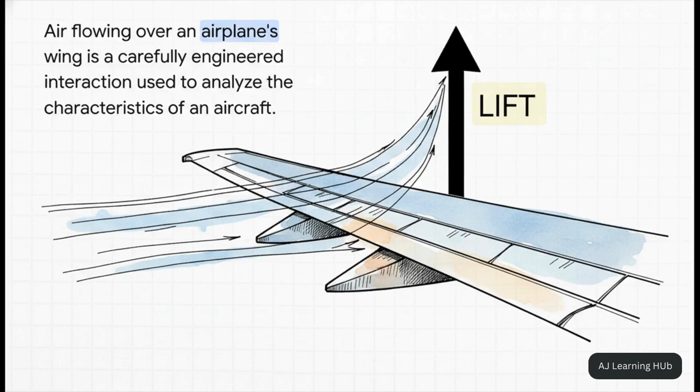All right, first up, picture the air flowing over an airplane's wing. This isn't just some random wind, right? It's a super carefully engineered dance between a solid object and a gas, all governed by pressure and velocity to create lift. Or how about the water swirling around a river bend? The way it just carves away one bank and drops sediment on the other. That's a perfect natural display of momentum and energy transfer happening inside a liquid.

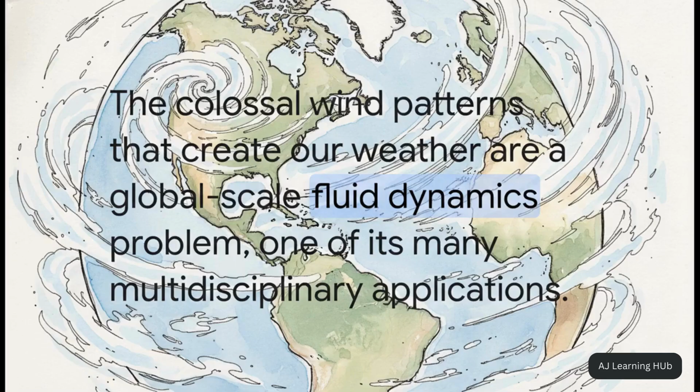And if we zoom way out, those massive wind patterns that create our weather, well, that's just a giant global-scale fluid dynamics problem, driven by things like temperature and the Earth's spin. And then let's bring it back down to engineering. That invisible force of air resistance, what we call drag, that's the #1 enemy of a high-performance car. And trying to minimize it, that is a pure fluid dynamics challenge.

So you see the connection, right? All of these things, they're all connected. They're like different dialects of the very same physical language. But what exactly are the rules of that language? Okay, so this isn't magic, not even close. It's a whole field of physics with a really systematic way of understanding how fluids behave. So let's unpack the core rules that govern all this incredible motion.

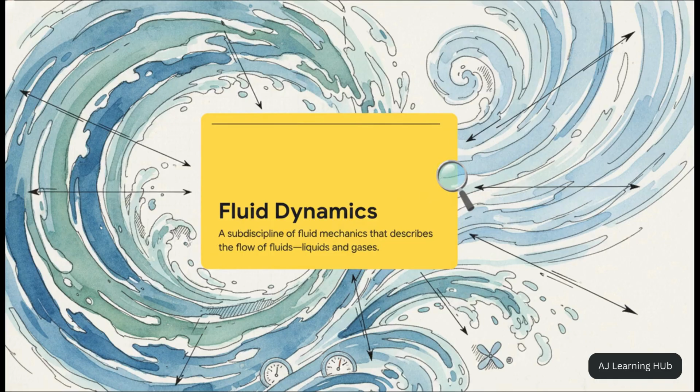Officially, we're talking about fluid dynamics. It's the branch of physics that's totally dedicated to describing the flow of pretty much everything from air to water. And the goal is to be able to calculate key things, like velocity and pressure at any point in the flow, at any given moment. But how in the world do scientists even begin to tackle a problem that complex?

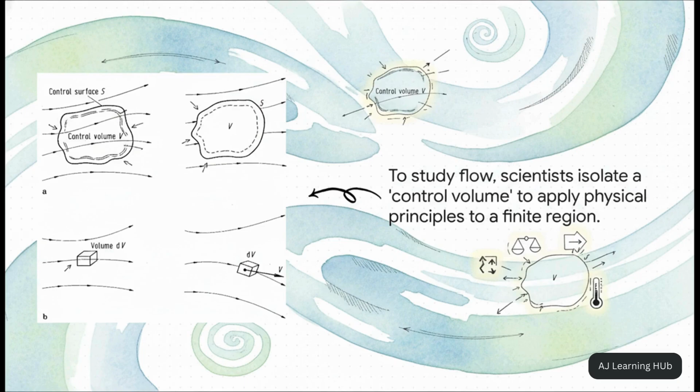Well, instead of trying to analyze an entire ocean at once, they do something really clever. They isolate a small, finite region of the flow, what's called a control volume, just like you see here. By focusing on this one manageable piece of the puzzle, they can apply fundamental physical laws to understand the whole big picture. And you know what's amazing? Those fundamental laws are actually ones you've probably heard of.

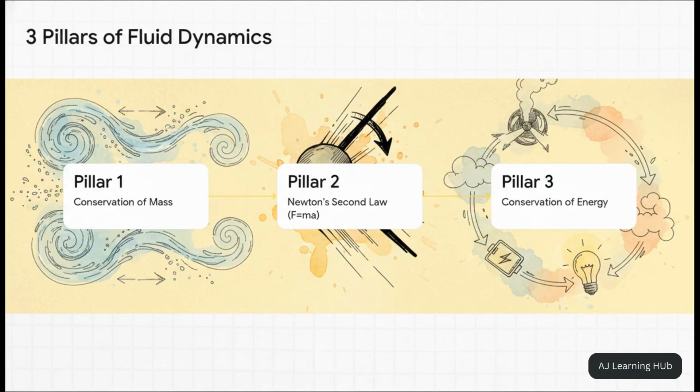At its heart, all of fluid dynamics really just rests on 3 main pillars. First, the conservation of mass. Basically, you can't create or destroy stuff. Second, Newton's second law, F = ma. And third, the conservation of energy. It just changes form. That's it.

So these 3 principles get translated into what are known as the governing equations. Now, you might have heard of the most famous of these, the Navier-Stokes equations. But try not to think of them as just scary, complex math. Think of them more like the precise, universal language that describes how every single fluid moves.

Then, on the other side, you've got turbulent flow, and that's the chaotic, messy stuff, full of swirls and eddies. Honestly, most of the flows we see every day, like water blasting from a faucet, are turbulent. So how can we predict which state a flow is going to be in?

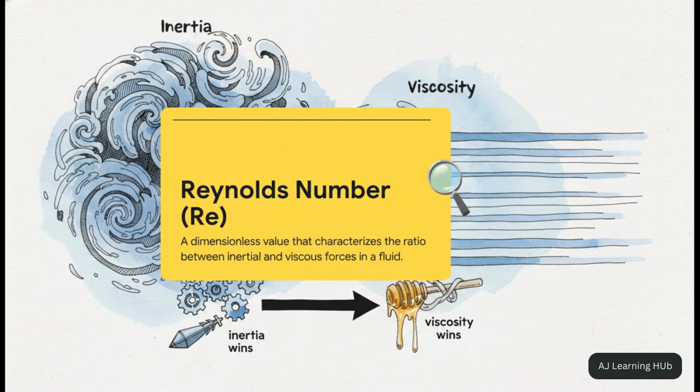Well, the secret is a special value called the Reynolds number. It's just a simple ratio, really. It compares a fluid's tendency to keep moving, its inertia, against its own internal friction, or its stickiness, which we call viscosity. If the Reynolds number is low, viscosity wins, and the flow is smooth and laminar. If it's high, inertia takes over, and things get turbulent.

Now, let's zoom in on where these forces really duke it out. Right up against any solid surface, there's this super important zone called the boundary layer. Because of that stickiness, the fluid right at the surface actually sticks to it. It doesn't move. We call that the no-slip condition. So in this tiny thin layer, the fluid speed has to ramp up from 0 all the way to the full speed of the surrounding flow. This is where all the action really happens.

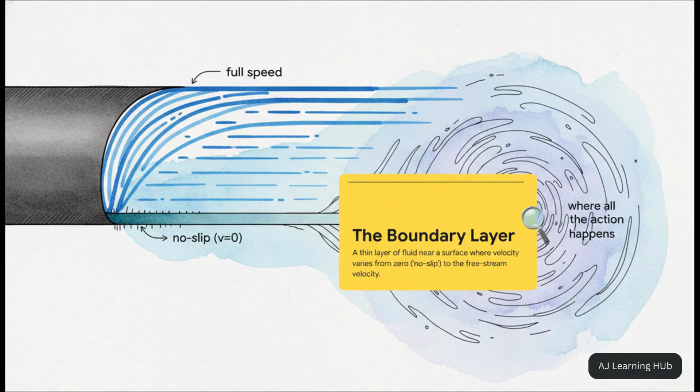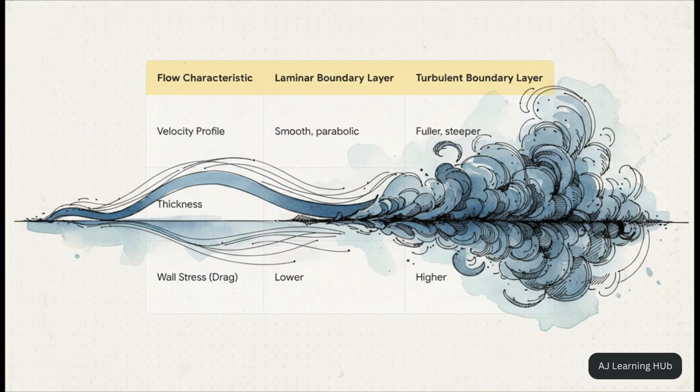And believe me, the state of this boundary layer changes everything. A laminar boundary layer, as you can see, is thin and smooth, and that creates less drag. But a turbulent boundary layer gets thicker, way more chaotic, and it generates much higher wall stress, which, you guessed it, means a lot more drag. So the takeaway here is that controlling this tiny little layer is absolutely crucial for any kind of engineering design.

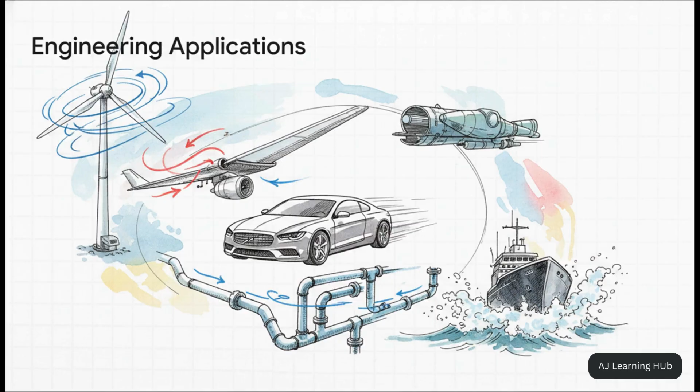And that brings us to the big payoff. I mean, why do we study all this stuff? It's because when we understand and predict flow, we can actually harness it. And that completely transforms what's possible in the world of engineering. The applications are just everywhere. I'm talking about designing quieter, more fuel-efficient planes and cars, creating better wind turbines, predicting the weather, managing huge water networks, and even designing ships. All of these fields rely on mastering fluid dynamics.

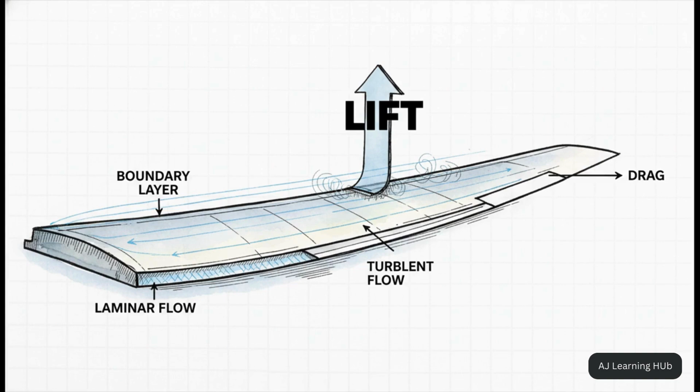Just take aerodynamics, for instance. The entire goal of designing a wing is really to manipulate that boundary layer. Engineers will shape the wing to keep the flow attached to the surface, trying to delay that transition to turbulence for as long as they can to ultimately minimize drag and maximize that all-important lift.

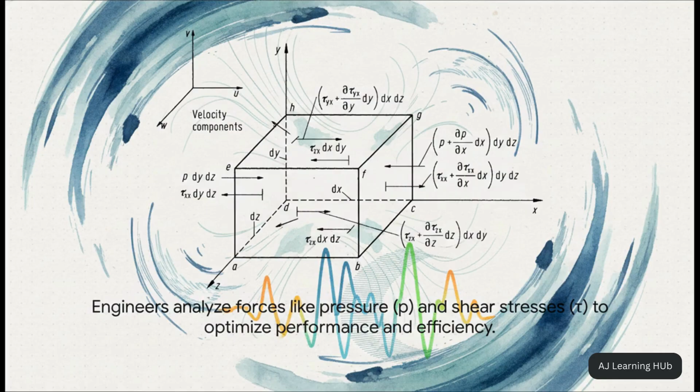So what they're doing is managing the two key forces you see right here. They use those big governing equations to figure out the pressure, that's the P, which is the force that pushes on the surface, and they calculate the shear stress, that's the Greek letter tau (τ), which is basically the friction of the fluid rubbing along the surface. Getting the balance between those two just right, that's the very definition of performance and efficiency.

So, have we figured it all out? Not even close. Fluid dynamics isn't some solved problem sitting in a textbook. It is one of the most active and challenging frontiers in all of science. And the biggest reason why is turbulence. While we can describe it, fully predicting its chaotic, swirling nature, from a massive hurricane down to the tiniest little eddy in a stream, remains one of the last great unsolved problems of classical physics. It's this beautiful, incredibly complex puzzle that we still haven't completely cracked.

And this is where our modern tech comes into the picture. To tackle this massive challenge, we rely on a tool called computational fluid dynamics, or CFD. We use the most powerful supercomputers on the planet to simulate those governing equations, which lets us get closer and closer to predicting the beautiful chaos of real-world turbulent flows.

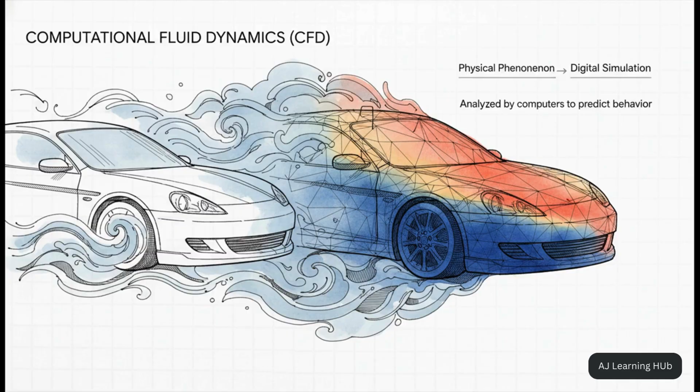And that leaves us with a really fascinating question for the future. I mean, think about it. We've gone from just watching flow in rivers to designing supersonic jets. So as our ability to simulate and predict how fluids behave gets even more powerful, what incredible new things are we going to build next?